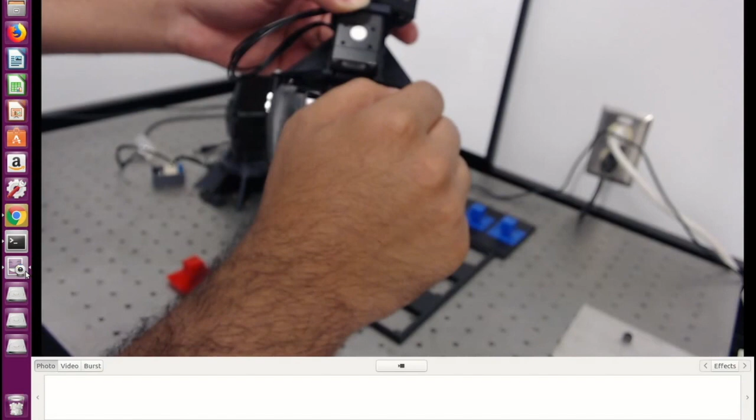This is how the gripper is made. There are 2 fingers here, and they are connected through this curved link that you see here, to the 7th motor, which is this one. There's a 10x10 bar, 10 millimeter by 10 millimeter cross section, aluminum bar that goes through them.

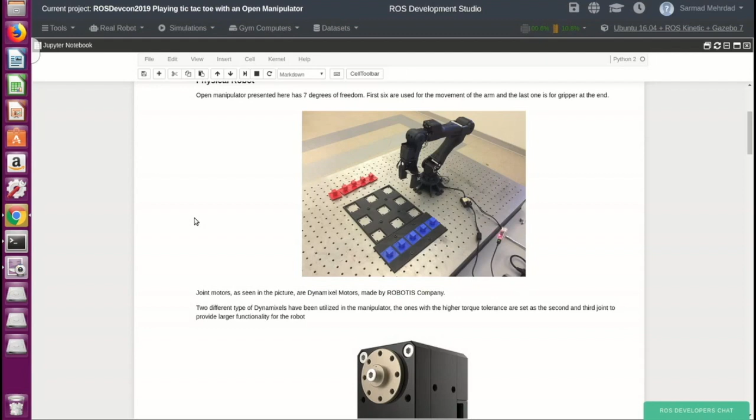Now the motors are Dynamixel motors. Let's talk a bit about them. Dynamixel motors are made by ROBOTIS company, and we are using 2 different models of them for this robot. We first initially tried to use only one type of these Dynamixels for the entirety of the robot. Then we realized we can switch 2 of them with a more powerful version, because joint number 2 and joint number 3 go through a lot of torque, and they have to have enough power to bear that amount of torque.

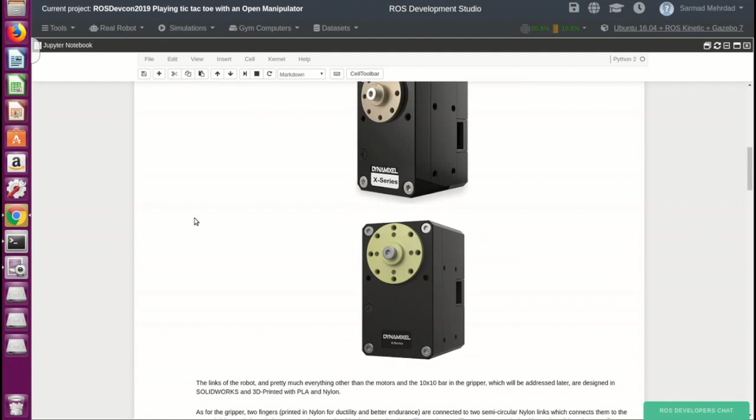The rest of the robot that you just saw are made by us, minus the 10x10 bar obviously, and the motors. They are all 3D printed, either with PLA or nylon. PLA is polylactic acid, and it's a more brittle kind of material. Nylon we use actually for the ductility of it, so that we can prevent catastrophic events like breaking parts or links.

If I show you the camera again, this part here that you see the robot is being fitted in, this is the 2nd joint, by the way. The first joint is on this bench and is responsible for rotating the base of it.

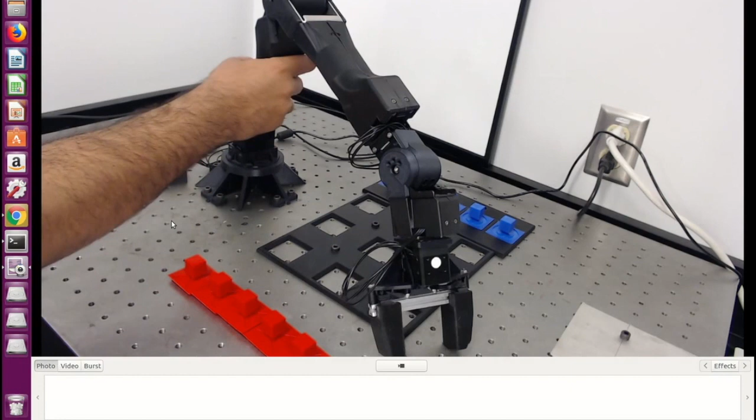This part is from nylon, and the gripper fingers are also from nylon. The rest all PLA. We removed some shells so that you can have a better understanding of the measurements and the architecture of the Dynamixel motors.

These 2 motors that you see here, joint number 2 and joint number 3, are the stronger ones, and the rest are a bit weaker. You can see the dimensions of them.

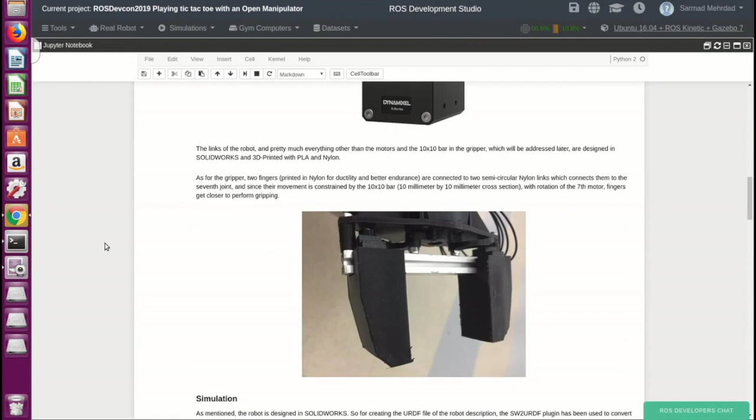Okay, we talked about the gripper, let's talk about the simulation now. All the parts that are 3D printed were first designed in the SolidWorks CAD package. After doing that, we assembled the robot as is physically in SolidWorks, and using SW, short for SolidWorks, to URDF plugin, we got our first score of the URDF model to be used in RViz and other applications.

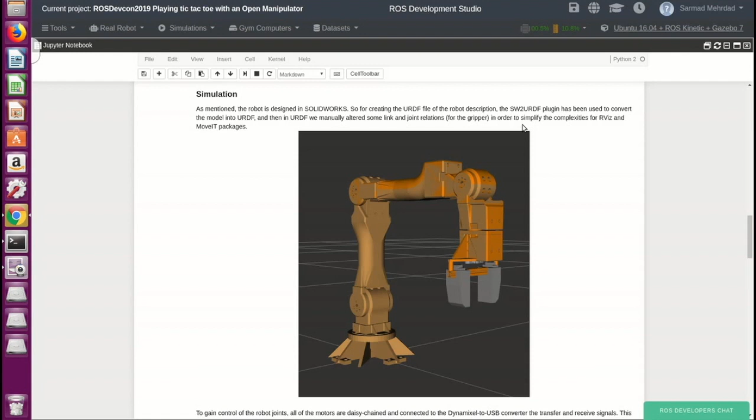Then we had to manually alter some of the links and joint relations, especially for the gripper, so that we can be able to use them in RViz. Because the robot, as you saw, is not acceptable by the URDF, and we're going to talk about that right now.

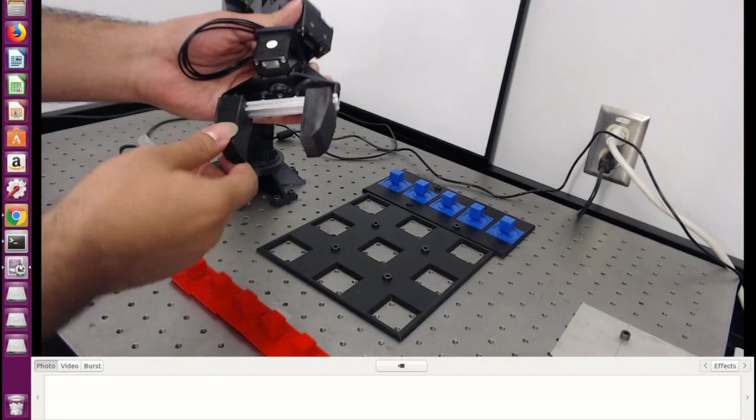Okay, let's go back to the actual one. For the fingers, I want your attention here.

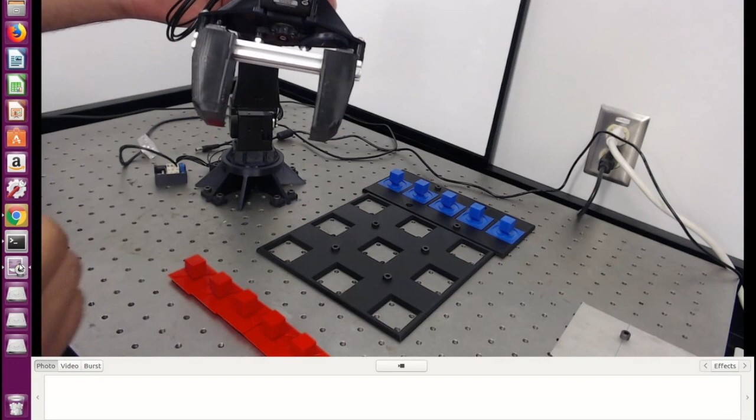This is a link. These two are links, and from one link to another, you should have one joint connecting them. But for this certain design, to ensure these grippers are moving along the axis of the bar, we had to first connect the bottom of them to the 7th motor so that we can move them by the movement of this motor. And we had to make this bar go through both of them so that we eliminate any rotation on the fingers, so they grip as we want them to grip.

Now, this design makes these two links have two joints, and that is not acceptable by the logic and standard behind the URDF modeling. That's why we had to simplify this design.

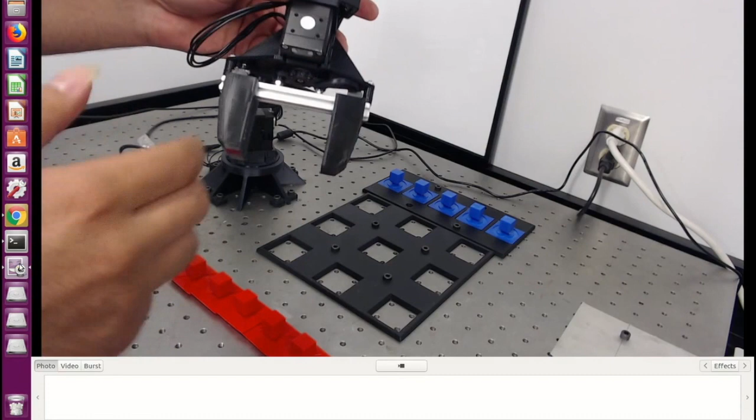As we're going to see later on, we had to get rid of these two links for the model in RViz, and for the movement of these two fingers, we had to mimic the rotation of the 7th motor with a linear simplification so that we can have a function in the simulation world as close as possible to the physical function. We're going to see what that means a bit later. For now, just know that this is what we had to modify.

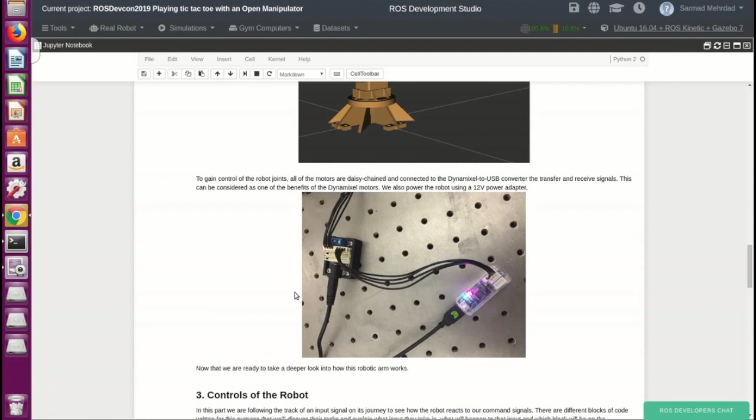For powering up the robot, we were using a 12-volt power adapter, as you can see here, and the robot should be connected to this converter, Dynamixel to USB. One thing worth noting here is that the benefit of using Dynamixel motors, along with the feedback control for position and velocity that they provide, is the fact that you can serially connect them, or daisy chain them as some call it, and then connect the final one to this converter, then to the USB, and have control over all of them, instead of having to connect each one to a base and then have control over them. So this is one of the very important benefits for us for using the Dynamixels.

Right here, these are the wires coming out of the first robot, and they are serially connected. The last one here, we put the power here, 12-volt power adapter here. We're going to power it on later on. And the last one will go through the Dynamixel to USB converter. It connects to the USB, and this USB is connected to the computer that I'm using for controlling this and recording this presentation.

And now that I'm showing you this feed, this is the tic-tac-toe board that we're using. It's a 3x3 grid printed by PLA, and this is the tray for the game pieces that the robot is going to use. These are just for the human playing against the robot. The red ones are for me, blue ones are for this manipulator right here.

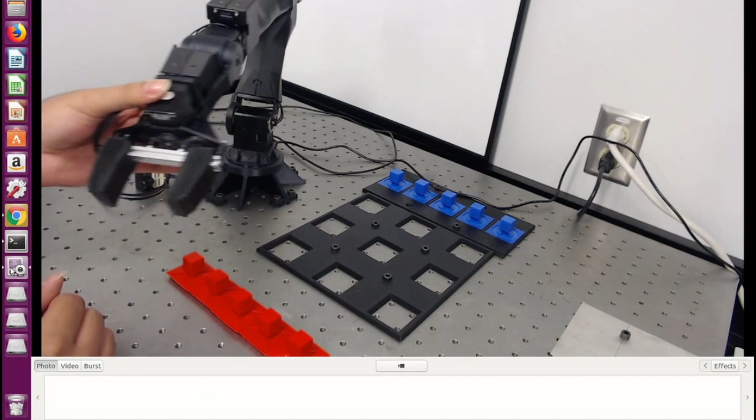And how are we doing that? We are constantly checking the torque generated by the seventh motor, the motor for the gripper, keeping in mind that we had set a goal for the seventh joint for it to start gripping. If I show you here, when the seventh joint operates for the gripping function, these two fingers tend to go really close if there is nothing to grip. But if we want to grip something like this piece, we shouldn't try to go all the way in again.

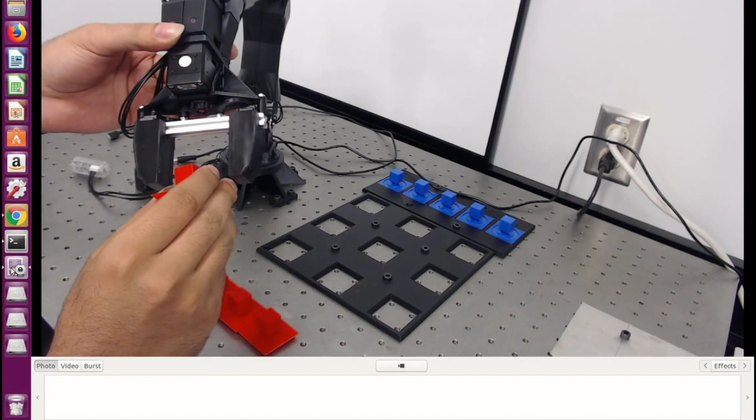Otherwise, we're going to break something. So

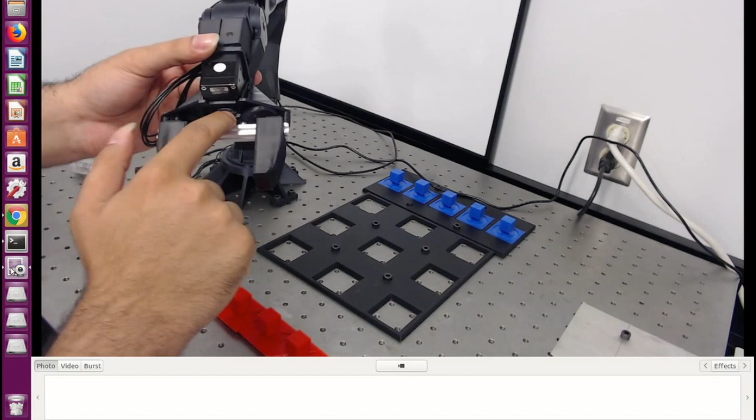How this works is that we are sending it a goal, an angle goal for this motor, and we are constantly checking if the torque is going to get past a threshold or not. If it did, we are going to change the goal to its current state.

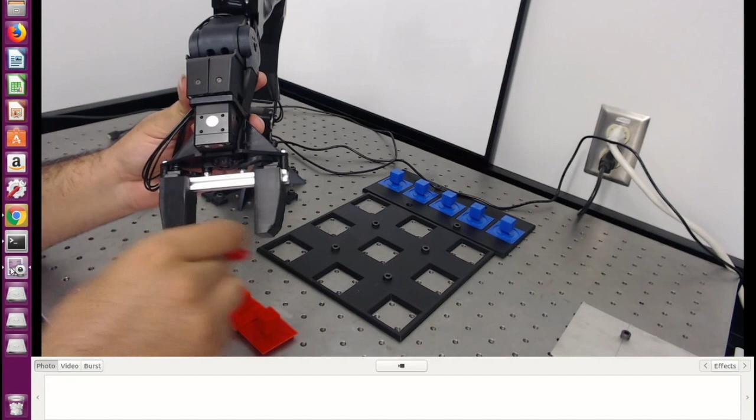So these two fingers are getting closer and closer, trying to get to an eventual goal. But when they grip something and the torque generated by the motor exceeds a limit, we are going to change that goal that we gave it initially to its current state, meaning that when the threshold gets passed, we stop there. The fingers are going to stop there.

And that is a firm grip. So far it served as a good grip for us. So this is how we control the gripper as well.

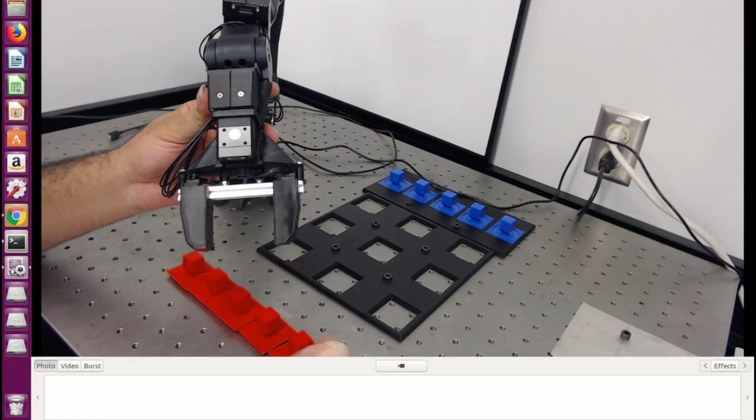Okay. Now we can move to the next section. I know I have bored you enough. Let's talk about the simulation now. I think I covered pretty much everything. Okay, so let's do something more practical.

Simulation instructions. You don't need to necessarily have the robot connected to the computer now because we are just talking about the simulation of it. We are not going to interact with the robot in this part. Okay, enough chit chat. Let's go to the Simulations tab and click on From My Workspace. In the Launch File tab, click on Clarkson Open Manipulator Gazebo.launch and click Launch.

Sometimes it won't work, sometimes you'll have to just close it and reopen it. Sometimes you might even have to reload the ROSDev.

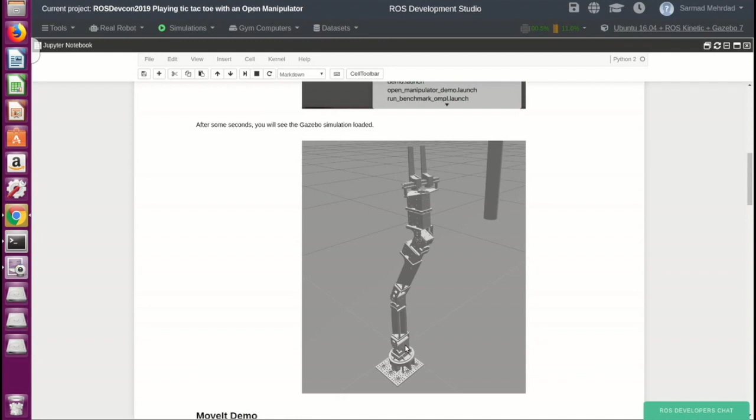You can spot the difference in multiple parts of this model, the design of the fingers for example, not having those shells and skins around it. So yeah, this is what we're going to see. And then later on, we're going to use MoveIt to move it, obviously.

Okay, so let's just try reopening the ROSDev. I apologize for this inconvenience.

There might be something wrong because I'm getting this error. I'm unable to connect to ROS master, and that is strange right now.

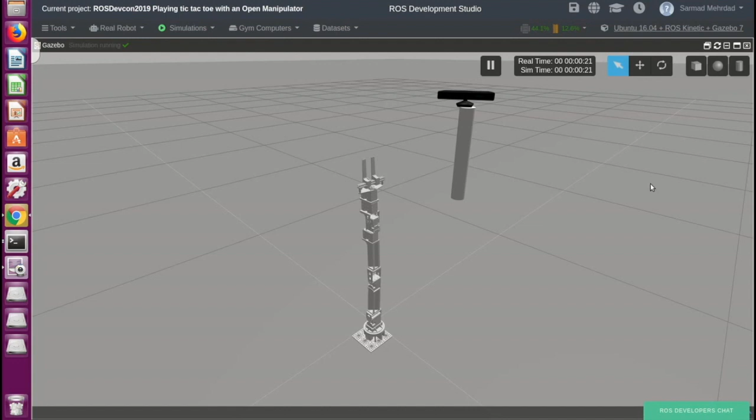I think I know what the problem was. Yes, the robot was connected. My robot here was trying to connect to the Gazebo environment here, and the Gazebo couldn't spot a master in my local machine. So this is what happens when you try to have both worlds. So let's not do that. I again apologize for this.

Now here, in this model, we had done the same thing. I'm having the hardest time. Okay.

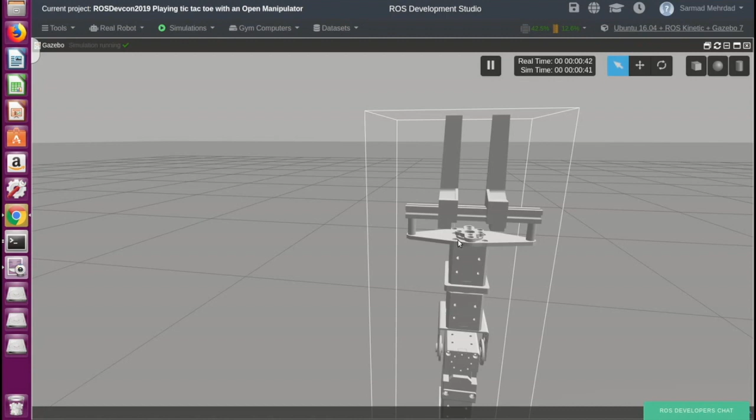As you can see, there are no links connecting these two fingers to the 7th joint. This is the model that we wanted to use for both Gazebo and RViz, which is why we made the fingers fixed, so you won't see any movement here for the fingers. But the robot is actually really good and functional.

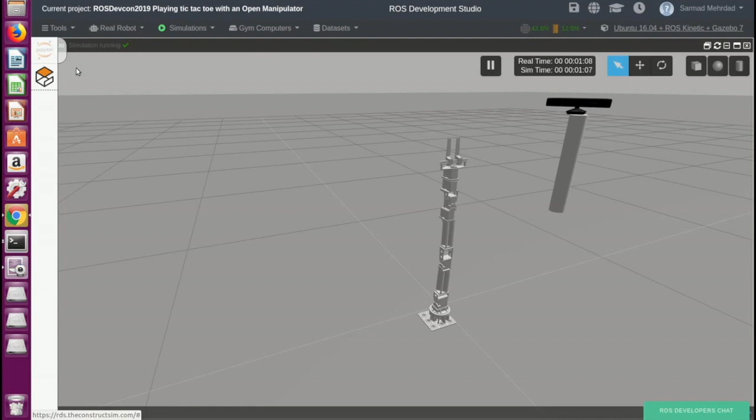So to see that function, we're going to open a shell file. We're going to launch this launch file using this command. Okay. We're going to see the log files, everything loads up.

Very good. Whenever you try to use MoveIt for planning movement here — for Manipulator or any other robot — when you see 'you can start planning now', that is your cue, you are good to go. So go ahead, click on the Tools tab and open Graphical Tools.

This is how we're going to check out RViz and MoveIt. Click on Resize opened app. Okay, this is the robot as seen in Gazebo, exactly with the same joint states.

So this is how the movement of the robot is going to be achieved. Right here, this entire window is for RViz, and this motion planning panel down here on the bottom left corner is the MoveIt plugin. So we're going to click on planning. In this query part, I'm going to select start state, put it to current, and update.

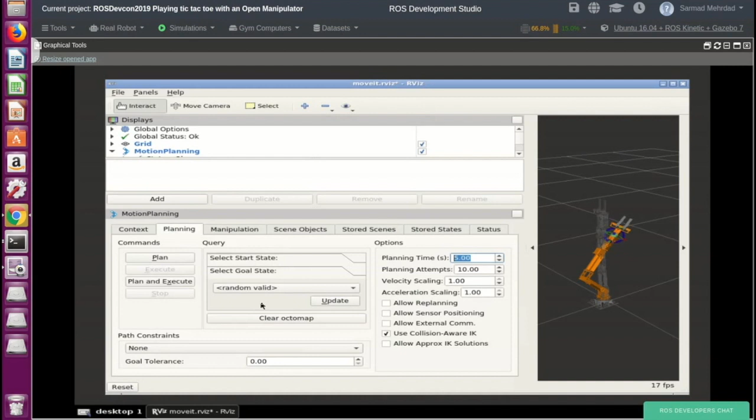We're going to select goal state and give it a random joint state for the goal. By updating these two tabs, I'm giving Kinematic Solver all it needs to calculate the path and plan it later using other blocks. Then I click on plan, and now I know how my robot is going to move once I send the command to it. Everything gets calculated before the function is sent.

So now I'm going to click on execute. I'm going to move fast to Gazebo so you won't miss the movement there. Ready? Here we go. Execute. Gazebo. We see the same path here.

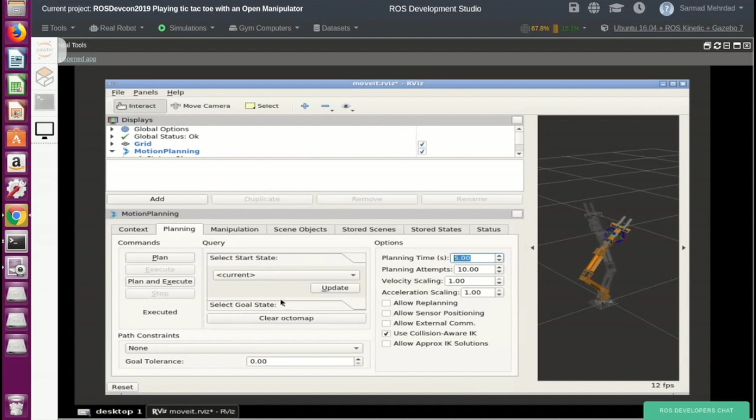Let's do it one more time. We're going to always use current for the start state, because that's the position the robot is going to start moving from. We'll give it another update, something more reasonable. Okay, plan, see how it moves. Perfect, a lot of maneuvering there. Okay, execute.

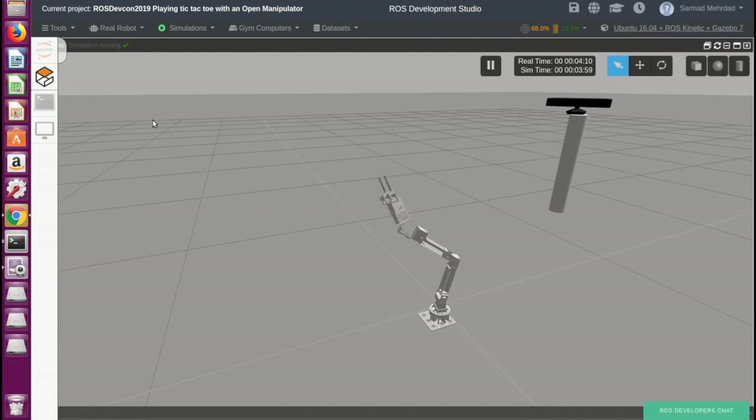Now for modeling the robot in Gazebo, there's more to it than just modeling in the URDF version. It's the same environment and syntax as the URDF, but to see those exact movements in Gazebo, you have to use Gazebo's certain plugins for controlling the joints, called ROS Control Gazebo plugins, if I'm not wrong. By implementing those for each joint, you can read the joint states topic and assign different publishings to different joints. That's how you get the movement in Gazebo.

By the way, this Kinect has nothing to do with it. I forgot to mention, this project is ongoing, not finished. Probably anything that comes to mind about possible research opportunities, we are likely working on. We're trying to add a Kinect for better understanding of the robot itself and functionalities like playing tic-tac-toe and understanding the board. We're trying to add a camera on top of the gripper for better understanding of what we grip, and trying to implement AI into the movement logic so the robot can play tic-tac-toe all by itself without a human operator in the loop, and so on.

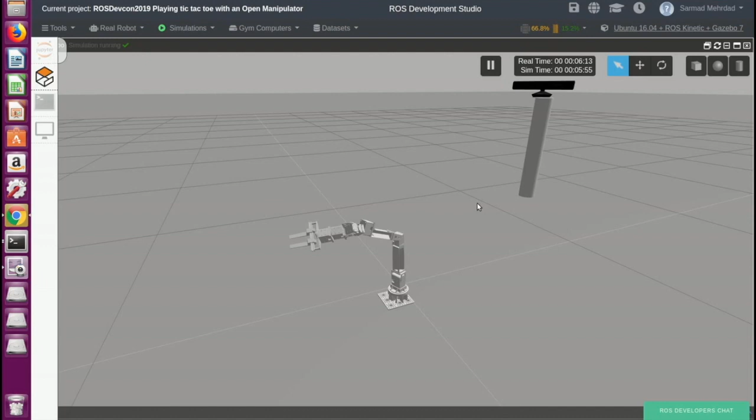So yes, I hope that explains why we have a Kinect on the model here. But we're not using this. Okay, now I think I've explained everything for the simulation part of things. Yes, we saw everything here.

Now we are going to connect the robot to the computer and try interacting with it. Open Manipulator X. Okay.

Before getting into stuff, I want to mention we have used Python and C++ for coding this robot. C++ is used more for the parts of the code that are in-depth and closer to the motors, instead of the human running the robot, because it's faster. Python is used for the logic behind sending signals, for example playing tic-tac-toe. You don't need blinding speed for sending a signal to grip, go up, and go somewhere else, because the moment you send it, there's nothing else to do with that signal—it will be handled by the C++ code more in depth. So I wanted to let you know we're using both Python and C++ here.

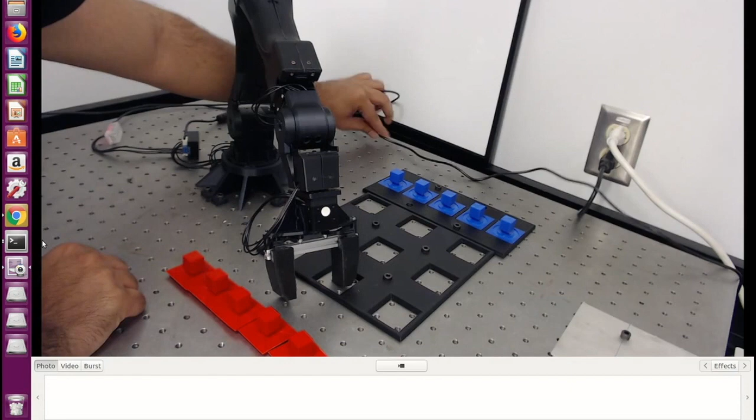Let me show you what we're going to do now. As mentioned before, these are serially linked. This is the converter, and this USB is directly connected to my computer. So I'm going to connect this — light comes on. And this is a jack for 12-volt power, and we power the robot like this. Okay, I think we're good to go.

Now let's go over the commands that we have to run on the local machine first. Since we are using the USB for communicating with the robot, we are going to first give the read-write permissions to the USB by running this command. Let me copy this and open a terminal. Okay, now we have given USB0 the permission.

And now we are going to run this launch file. Basically, controller launch is the name of the launch file, and open manipulator core is the package. Remember the schematic block diagram I showed you? It loads that entire diagram up and makes it ready for you to use. After you do this, you're going to see the joint states topic show up, the gripper commander topic for opening and closing the gripper, and 5 different signals indicating that there's an action active for you to use — that's pretty much what it does.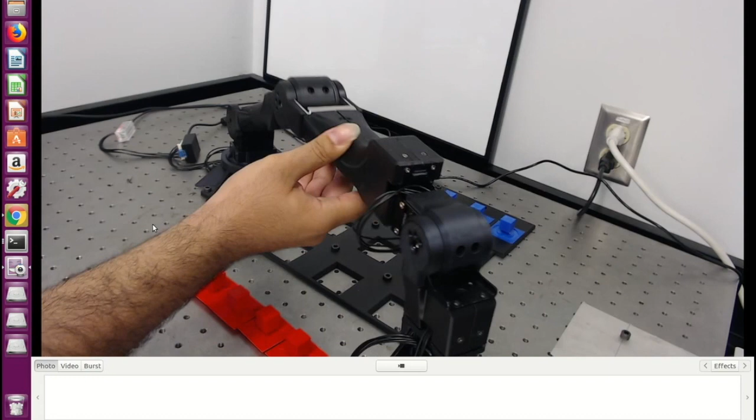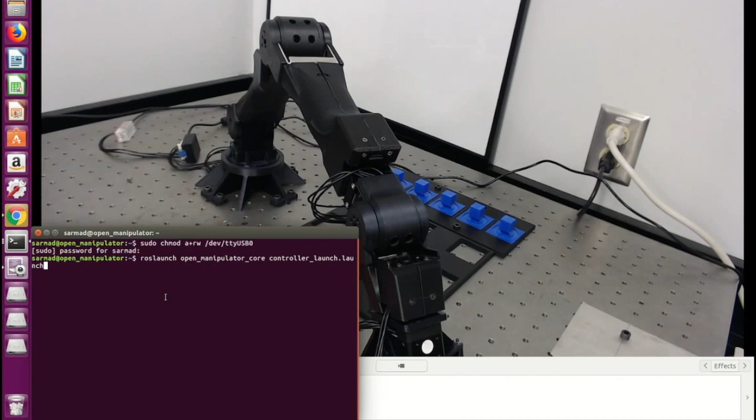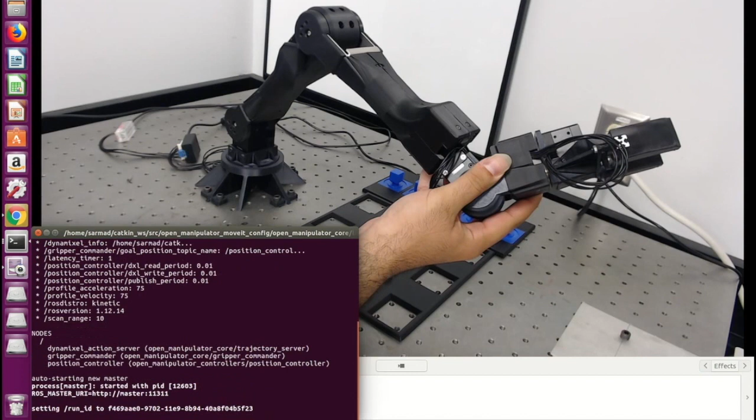Now, when I run this, it goes through all the motors and identifies them, and after identifying them, it enables the torque in them. If I show you the robot right now, holding this up and letting it go, it's just dead — it cannot hold anything, cannot hold any position. But if I run that launch file, we can do this. It will go through all the motors, identify them, and enable the torque. That's why if you hold it in a certain position, like this, and run the launch file, now we can let it go.

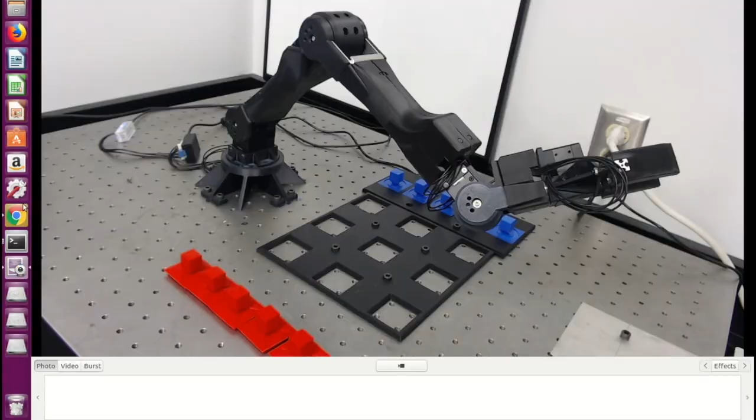Now we can go back to ROSDev Studio. Let's check if the robot is actually really connected — what we claim is true. Let me open up another terminal. This is my terminal on the local machine, this is ROSDev. If I get a ROS topic list... okay, you will see 5 different signals indicating an action is available for use: gripper commander, joint states, position controller, and for 2 different states, Dynamixel state and position command, and ROS out.

Let me get an echo on the joint state topic, for example, and see what we're getting. Let's just get one echo. Okay, IDs 1 through 7, positions, velocity should be 0 because we're not moving the robot at all. And the effort — you can see the effort on joint number 2 and 3 is relatively really high. That's why we had to substitute the motors with more powerful ones.

Now let's go back to ROSDev and do a list here. Yes, this means that we are fully connected to the robot in the real world through ROSDev, and we can start interacting with it.

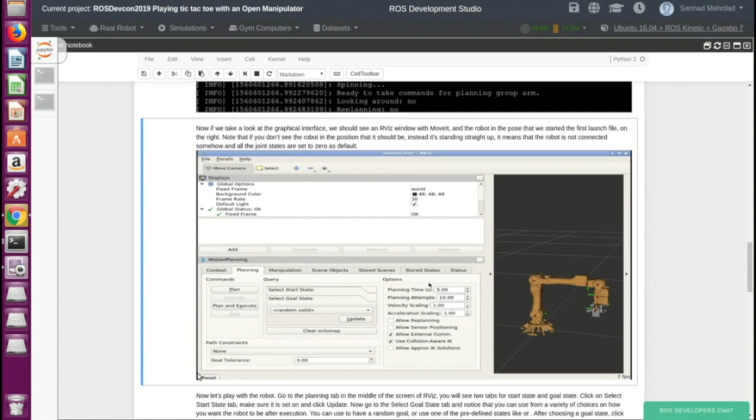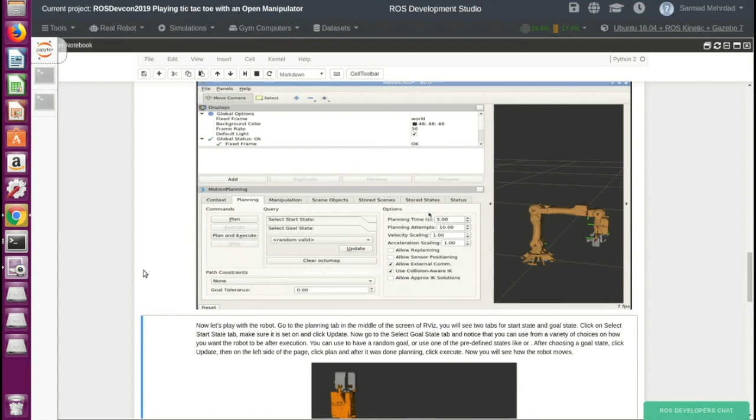Now, having a not very decent connection isn't going to cause drastic problems, but it might slow stuff down. For example, when we play tic-tac-toe with the robot later, you might get delays between sending one signal and the next. Instead of the robot going from one place to the other smoothly, it might spend like 2 seconds before going to the next position and orientation we want it to go to. Problems like that might be in order.

Okay, it's nearly towards the end, but talking from experience, it's not going to work because of this error line here. So we're just going to reset it. Don't worry about anything. Again, we're just going to plan it to see how it's going to move from one pose to another.

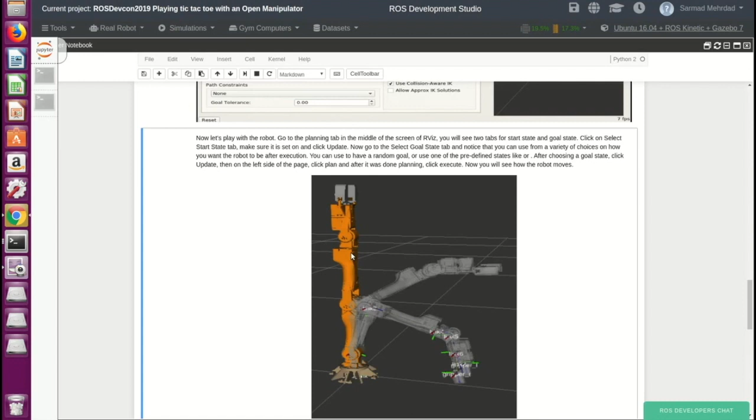Let me open the graphical tools so I can use the reset button. Expand this. Right, this is the robot as I left it right now. Planning, current. If you select this tab, you'll see some predefined poses. Like 'start' is, if I update this, fully standing up.

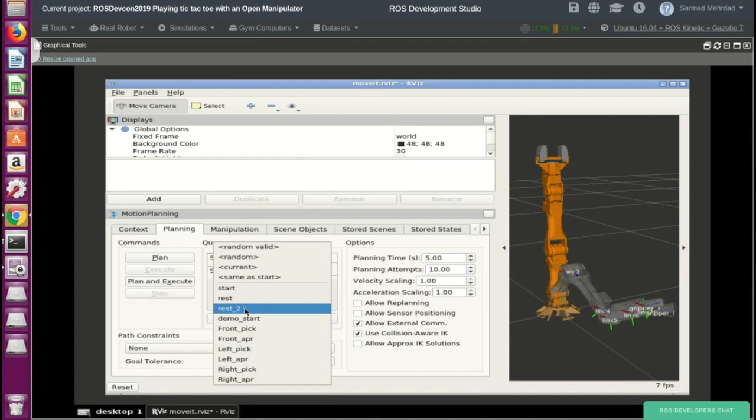'Rest 2' is something we use a lot, where the robot takes a bow basically. If I plan this, okay, it won't let me. That's why I have to reset. Don't worry about anything. See if it did. Okay, it's resetting. Don't worry about the yellow warnings, it's just RViz restarting itself.

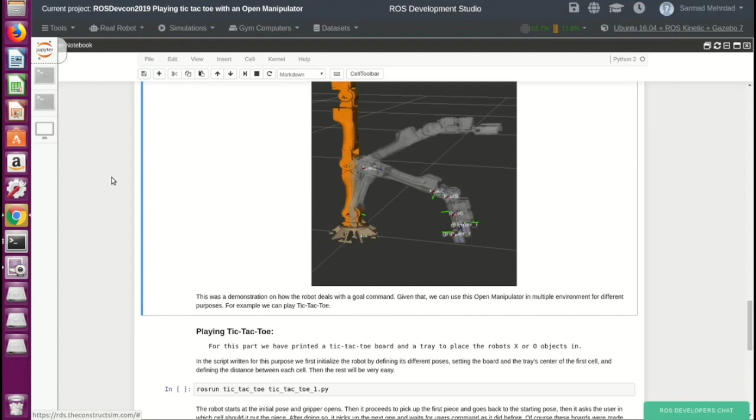After understanding these parts, when we get to playing tic-tac-toe, it's not going to have any surprises for you. We had talked about how we sent the signals to the robot and how it's going to react receiving that signal. Let's talk about some unexpected occurrences while that happens.

Sometimes, again because of a bad connection, you might experience delays and lags. That is one of the unexpected occurrences.

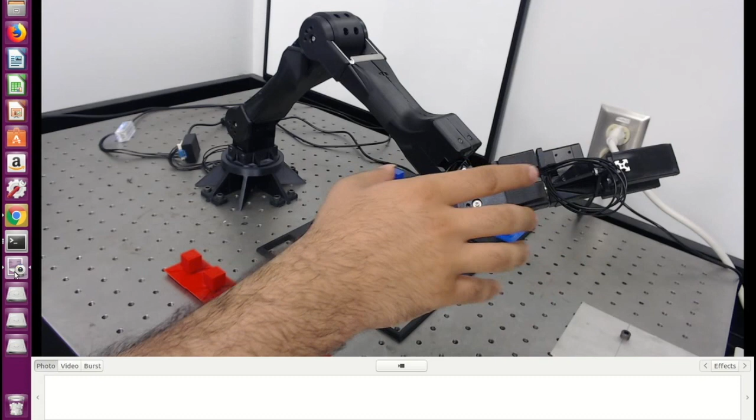Sorry, and the kinematic solver sometimes gets glitches. By that I mean if you are in a state like this and you just want the robot to move slightly to the right, to have this same orientation but in a different position, you'd think the robot should move in a very simple manner, just the base moves and you're there. But sometimes the kinematic solver calculates a path for the robot so that it goes crazy before getting to that goal. Instead of a simple movement, you'll see movement in a lot of joints, like it's gone crazy. It just goes up, does different revolutions, and then comes and not even accurately reaches the goal. That is a rare occurrence, but I'm letting you know so there won't be any surprises later on as we proceed.

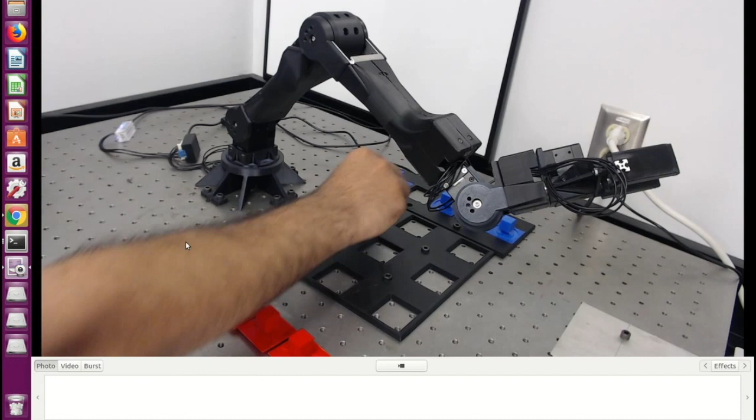For playing tic-tac-toe, sometimes because of not tuning the motors as well as they should be tuned, or using ductile materials instead of brittle materials, grabbing one piece and placing it in the desired cell might not be very accurate. So something like this might happen: the piece can stand up like this to the side, to the edge of the cell. That is also something we might see today. Hopefully not.

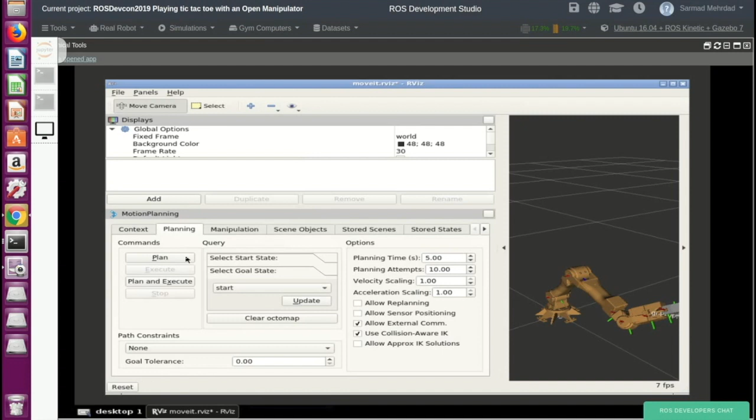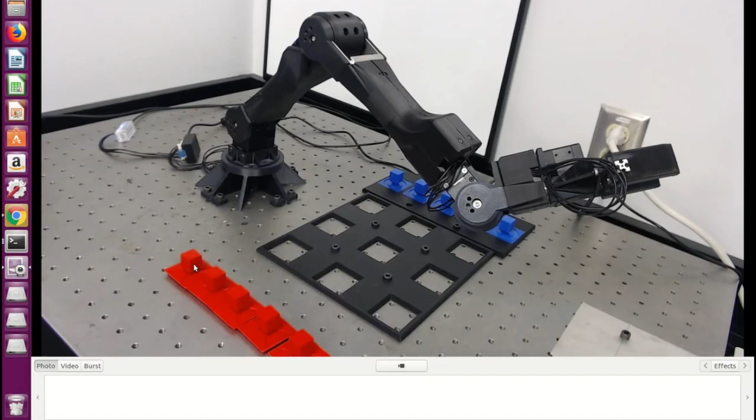Okay, let's check the shells again. Okay, I think we're good. Let's update the current and let the robot stand up. Plan. Okay, oh, I did not update this. Okay, plan now. And I'm going to press execute, and then immediately I'm going to show you the robot. Stood up. Now let's make the robot take a bow.

Rest 2, update, plan, and execute. Okay, so that was the explanation behind how you can interact with the robot through ROS Development Studio. Now that you know how this entire thing works, let's just play some tic-tac-toe.

Keep in mind that this previous launch file should be running before you start playing tic-tac-toe. So we have a package named tic-tac-toe, and we're just going to ROS run it. We don't have a launch file for it. Just type ROS run tic-tac-toe.

tic-tac-toe1.py. So when I run this, there's a sequence of events the robot has to go through. It's going to go to the initial state, open the gripper if it's closed, pick the first piece, come up, and go to the first starting point, somewhere very close to this position and orientation. And then it waits for my command.

We first initialize the cells 1 through 9. We initialize the board with the fifth cell as the center of it. And because it's symmetrical around the X and Y axes, there are no problems identifying other cells, because the increment from one cell to another, the difference in X's and Y's, are the same.

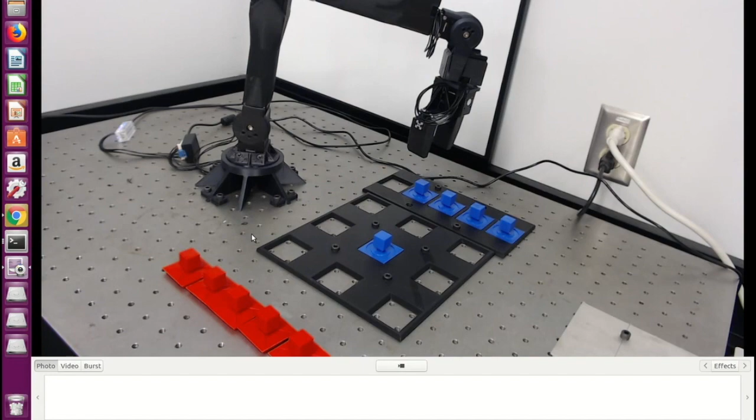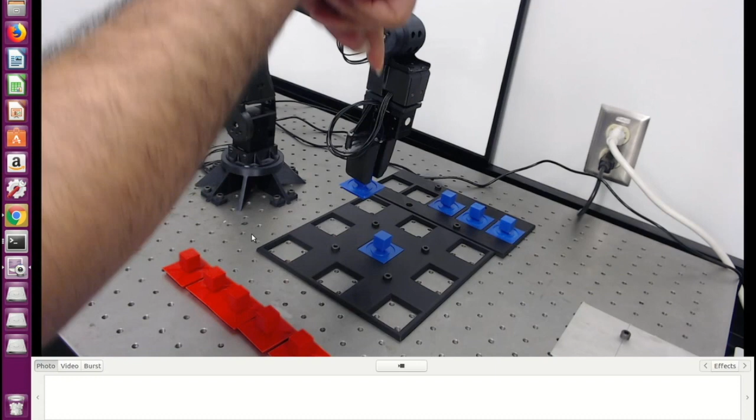The X, Y, and Z's you see here are the X, Y, Z of the cells where the end effector should hover. The X, Y, Z, W, which indicates the quaternion, is pretty much the same for each one, because the gripper should always point down for gripping and placing, so we really didn't have to indicate that in our code. So let's put one here, 5, and then 9, and see what we're getting.

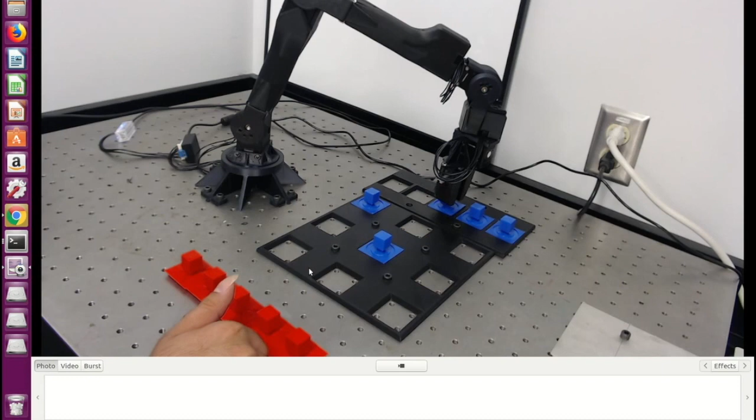I can also play, but I think you trust me enough to know that I can't play tic-tac-toe, so let's just focus on the robot. Okay, this is 9, so let's do 9 now.

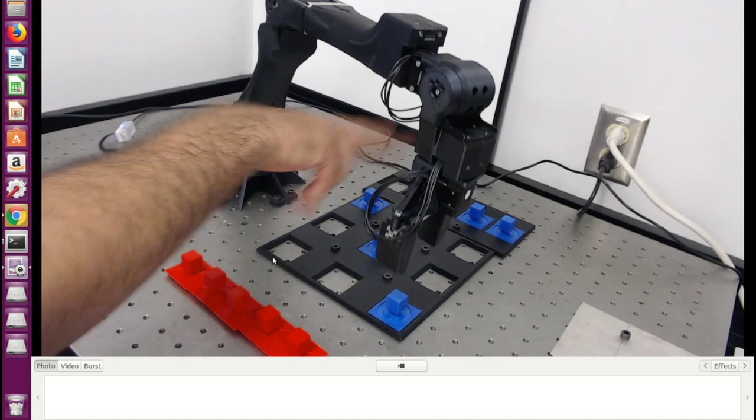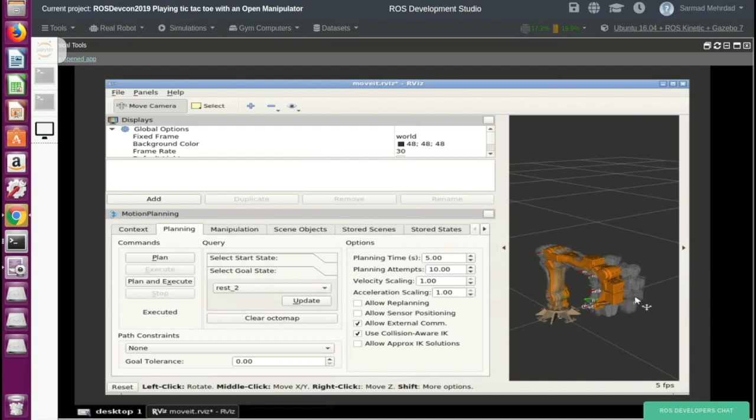Now we're on the same track, let's do an X. So let's put the next one in 3, and the next one in 7. While the robot is doing that, you can see it jump from one pose to another in the RViz environment. Each time it updates, you'll see this phantom of a robot trying to get to the next goal. So this is the goal it's currently at, and this is the robot trying to get there.

So, okay, we wanted to do it at 3, the other cell. Perfect. The last piece, we're going to put it at 7. Yeah, kind of dropped it on this one. Probably it's tired. Oh, obviously.

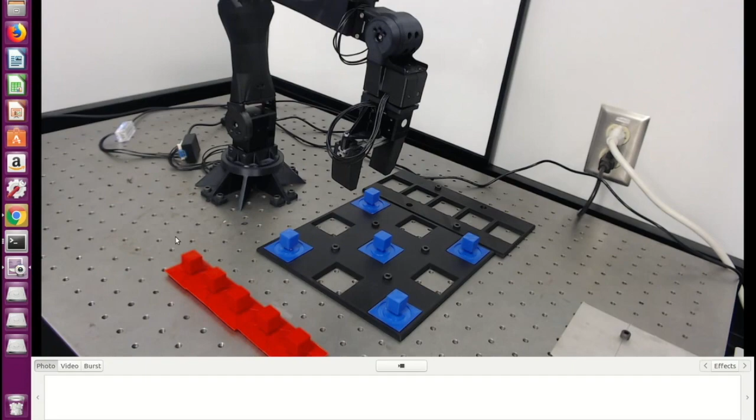Okay, so that was a demo on Clarkson University's Open Manipulator. Hope you guys enjoyed it. Thank you so much for joining us again. And again, for the next steps of this project, it's full of potential, honestly. This is not the pinnacle of our research, just to play tic-tac-toe with a robot.